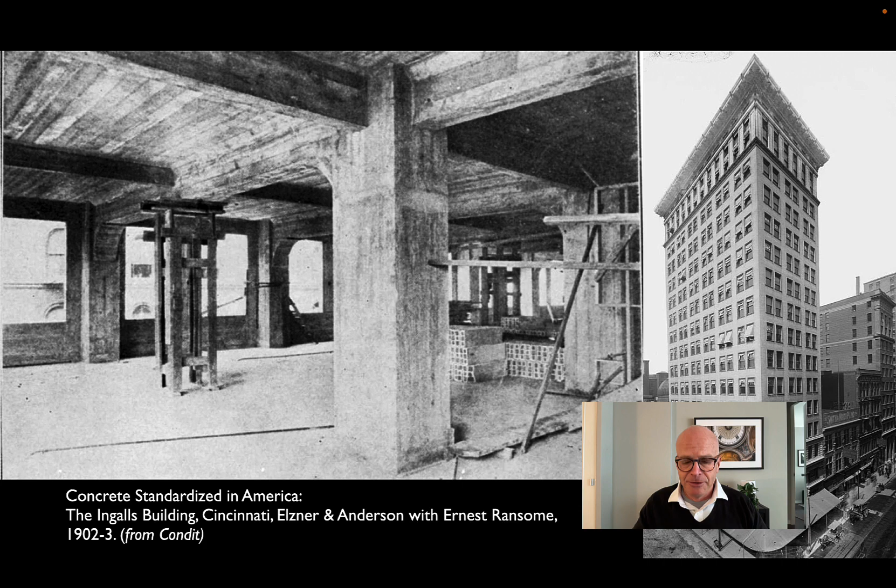And we had looked in particular at this one building, the first concrete skyscraper, the Ingalls building in Cincinnati by Ernest Ransome, with these local architects, Elzner and Anderson. And when this building was published, there's an interesting quote that Elzner, the local architect, comes up with, where he really defines the moment in an interesting way. He says the skyscraper problem still remains unsolved. The skyscraper is still a new architectural type. We don't quite know what we're doing with it.

And he defines it in terms of materials. He says that steel is vulnerable to fire. So building laws very properly, he says, require that we dress it up, right? We have to put another material around it. So we can't actually see the steel. The visible architecture of the steel skeleton building will always be a sham construction, he says. Concrete, he thinks, offers an opportunity, right? Because you can actually see the material that's doing the work.

Now, you can't see all of the material. You can't see the reinforcing. But he says that there should be, anyway, a kind of honesty in seeing the actual constructive material that is holding the building up. So to Elzner and to some of the other figures that we've looked at, concrete presents an opportunity to bring a kind of integrated approach where the architecture can emerge from the engineering. You can look at the material, you see what it's doing. The concrete can take forms that tell you something about its structure or about the way it's put together.

We'll look at a couple of figures for the rest of the lecture who really think about this and try to come up with a new architectural approach in addition to occasionally a new engineering approach, right? Trying to figure out what concrete means for the profession. The first one, the one who takes the earliest and most complete look at concrete's potential as a new architectural material, is a French student named Tony Garnier in 1904, so about the time that the Ingalls building is going up. Garnier does a thesis project at his university for an industrial city, the Cité Industrielle.

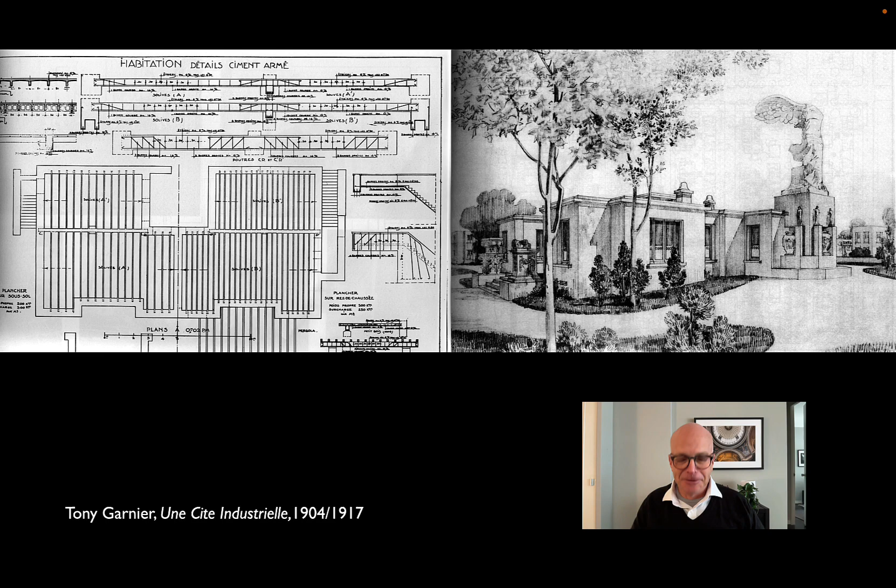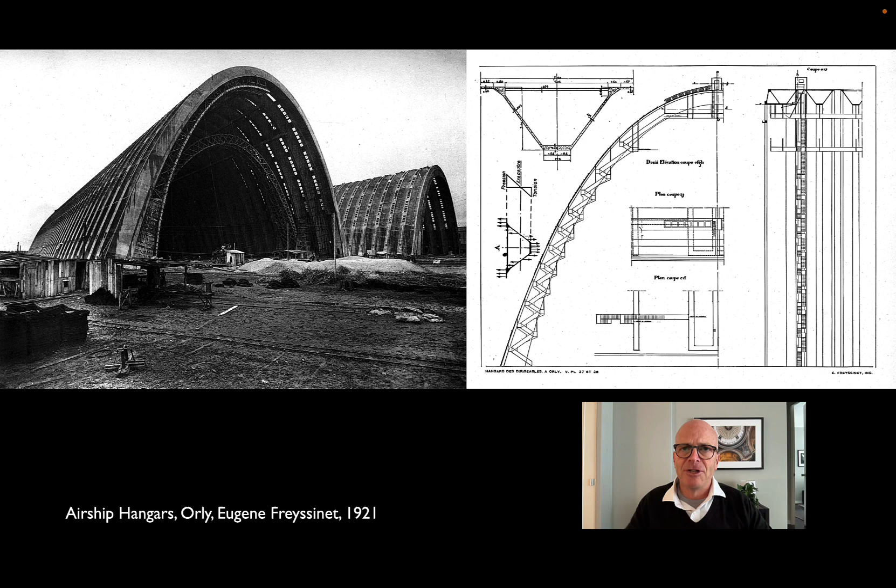It's a complicated shape. It's very difficult to build that shape out of timber or out of steel, whatever Freyssinet is using for the scaffolding. But Freyssinet argues you only need to build it once, and you can use it then again and again. And here, this construction shot shows the traveling formwork. Very complicated catenary shape that allows Freyssinet to build one arch at a time, and the formwork literally travels down the length of the hangar, sort of building an arch as it goes.

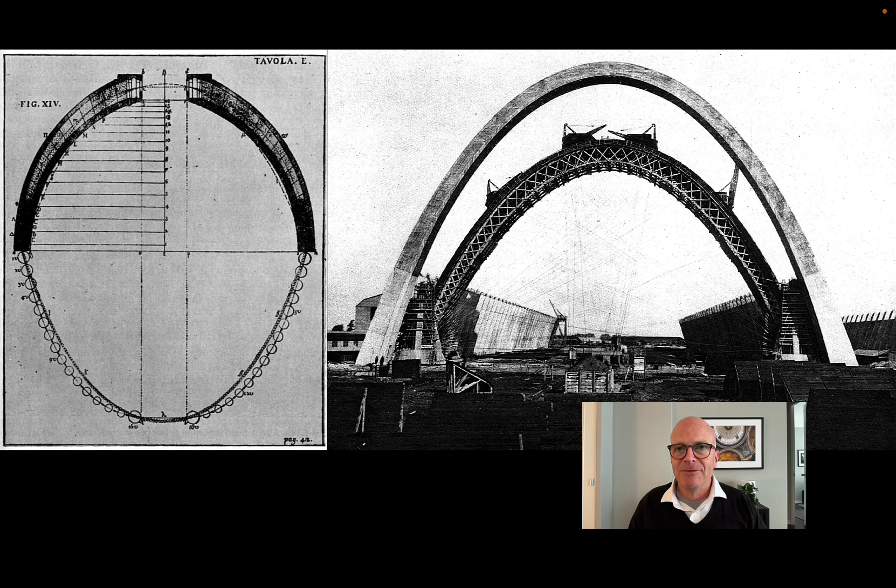And Freyssinet says you can just do this infinitely, right? As long a hangar as you need, you just keep building arches, you keep using the same formwork, and there's an economy there. You've invested a great deal in that one piece, but because concrete can be poured again and again using the same formwork, there's an economy in reusing that difficult formwork over and over. And just for comparison, here's Poleni's drawing of St. Peter's. Very, very similar catenary shape, funicular shape. Here, achievable relatively simply compared with the masonry dome in this new material of concrete.

One of the most versatile designers in concrete is a Swiss engineer named Robert Maillart. Maillart is best known for these bridges, which we'll come back to here in a second. But he's maybe as important for his investigations into the beamless slab, right? How do you get heavy floor slabs to stand on relatively narrow columns? Maillart is a designer, but he's also a kind of experimenter, very much in the Fairbairn tradition, only now with reinforced concrete instead of with iron.

And he argues that this is easier on the job site because you can just simply order 10 different thicknesses of rebar, and all it takes is organizing where they go. You don't need special conical formwork to be fabricated in the shop.

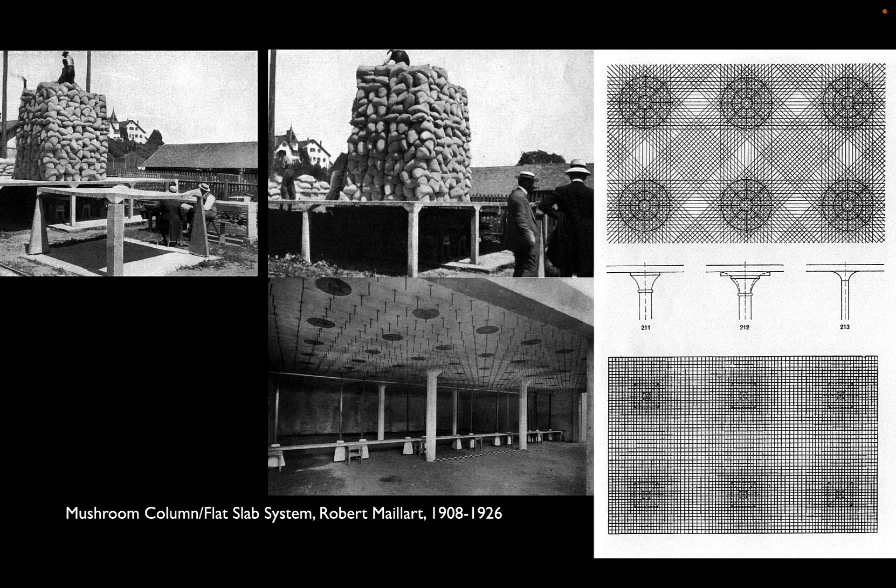You can see his experiments here on the left, where he's loading up slabs with sandbags. And then on the bottom, you can see he's using these early electric devices to measure the deflection of the slab, to see if he can figure out how the loads are traversing through the slabs by looking at an actual construction of it.

And that reflects the fact that the columns on the lower floors, of course, are carrying more load because it's like a river, right? The loads from each floor flow into the column. The columns on the bottom are going to be carrying the loads of all the floors above them, and so they have to get quite thick.

In iron construction, there's a problem with trying to get the steel columns to line up perfectly and to rivet them to one another in a way that loads flow from one floor's columns into the next. In concrete, you just have to make sure that the center of the formwork is the same at each level, right? And so this is a measure of concrete's versatility, that you can make different shaped columns or different size columns with relative ease.

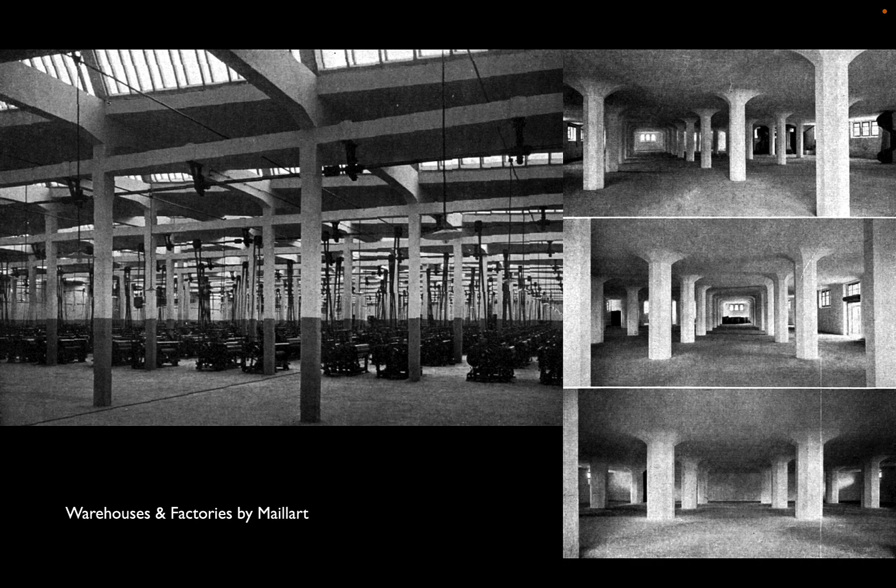Maillart, though, was also interested in concrete expression, and he won a series of bridge commissions throughout Switzerland that we can relate back to the invention of the automobile and the fact that Switzerland is a mountainous country, right? All of these places where cars need smoother transitions between slopes than horses do, and so there's a whole construction program in Switzerland of trying to build roads through mountainous territory. And Maillart gets commissions for many of these bridges.

And what he investigates is the way that concrete, which is a stiff, relatively brittle material, can be combined with steel, which of course is very ductile, to give bridges the kind of flexibility they need to take dynamic loads. So imagine a truck rolling over a bridge. Any bridge that is loaded is going to deflect a certain amount. If the bridge can basically bend and not break, it's going to be easier on the foundations. It's also going to be healthier for the bridge structure itself.

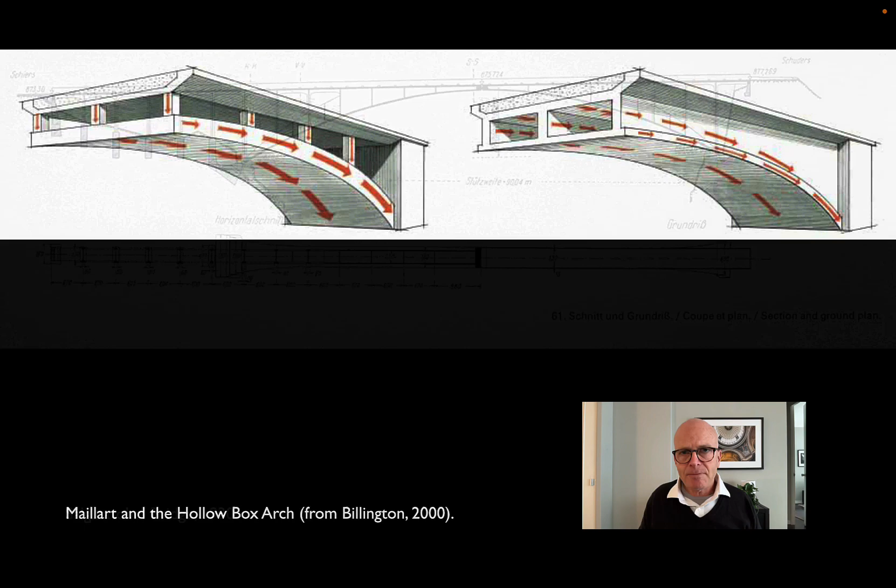And when this happens, Maillart basically realizes that you can combine the arch with the deck by creating a web in between. And he calls this the hollow box arch, where the entire bridge structure, not just the arch itself, gets recruited into carrying the load across these valleys. And what you end up with are these very, very unique shapes where the spanning component of the bridge is sort of an arch, but sort of a beam.

And in this case, you can see that in the center of the span, Maillart designs a hinge, right, so that the bridge can flex a little bit. There are also hinges at the supports so that the foundations won't get twisted out of the ground as the bridge deflects. In between there, though, you can see that the arch, the three-hinged arch, gets very, very thick at its kind of midpoint and very, very thin towards the pins.

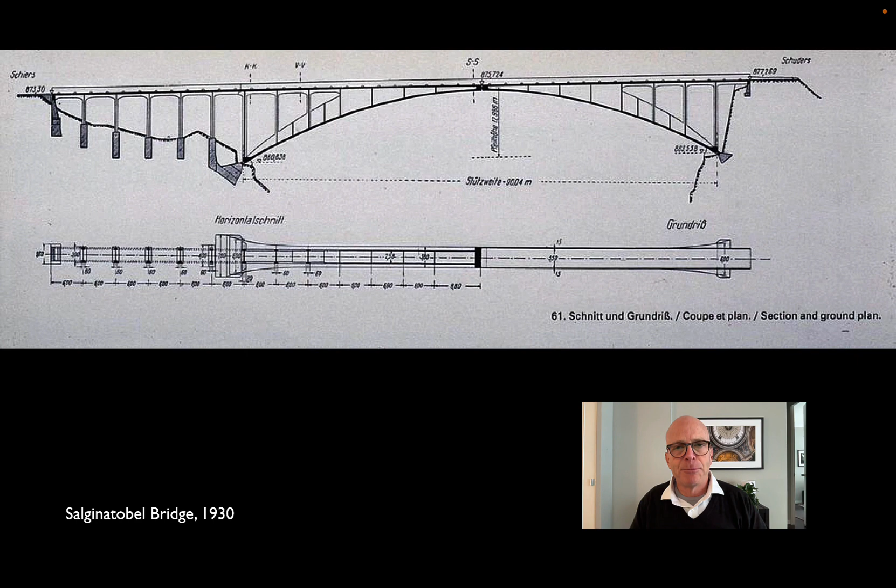And that reflects the fact that the arch is also in bending, that it's not just purely in compression. And the thickness and the connection with the deck above are designed to make a form that works partly in compression, partly in bending, and as you can see from the pins, also provides some ductility to the bridge, almost like a fuse to keep the concrete, the parts of the bridge, from cracking.

When you look kind of inside at Maillart's reinforcement, you can see that he's using these meshes that were originally patented by Monier some 50 or 60 years beforehand, and those are spreading the various stresses that the beam arch is undergoing throughout the entire section. On the right, you can see a lateral support. This is toward the abutments.

And here too, the bridge needs some ductility in the opposite direction, right? The short direction. If you have a truck on one side, the bridge wants to bend a little bit towards that side. You can see in the reinforcing detail that this is very clearly a hinge connection where the steel is providing some ductility, allowing the concrete to bend a little bit instead of breaking.

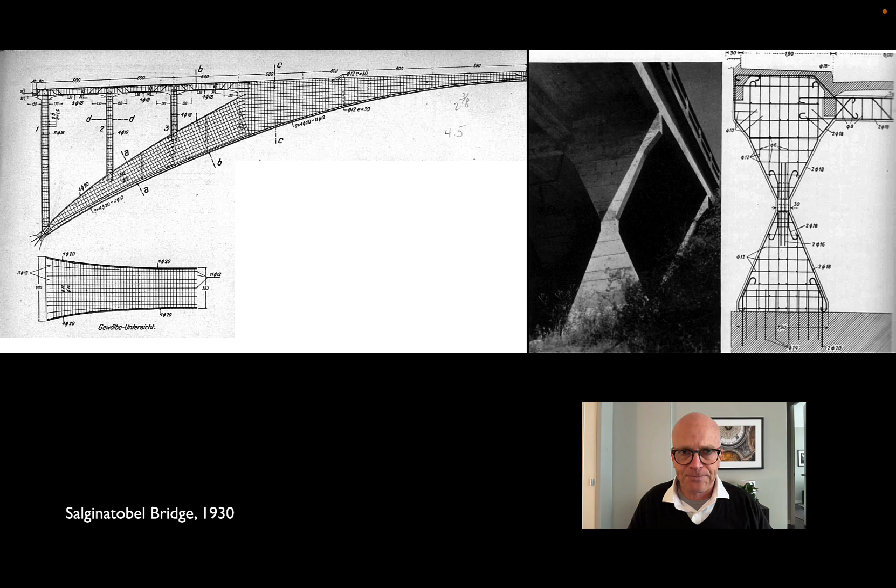All of that to say, though, that Maillart is also clearly interested in the aesthetic possibilities here. And at Salginatobel, the bridge that we've been looking at here for a little bit, he's exploiting concrete not only for its structural purposes, all of these things that when you combine it with steel, it can do to solve the problem. He's also very clearly interested in expressing that, in showing, just as Gustave Eiffel was doing with his bridges, not just finding pure structural shapes, but thinking of ways to tweak the materials, to tweak the constructions, to make it into a story, right? To tell the story about the structure in addition to solving the problem.

In the final part of the concrete lecture, we'll look at a family firm in Paris that takes a very, very different view of concrete. That instead of thinking about just the kind of structural expression that's latent in concrete, looks at the way that concrete is actually formed, finds a very, very different language in the formwork that they use to build the concrete, and makes almost the exact opposite argument to Maillart in thinking about what concrete wants to represent, what sort of forms it wants to hint at or remind us of, and to come up with a very, very different language that they think is much more appropriate to this brand new material.